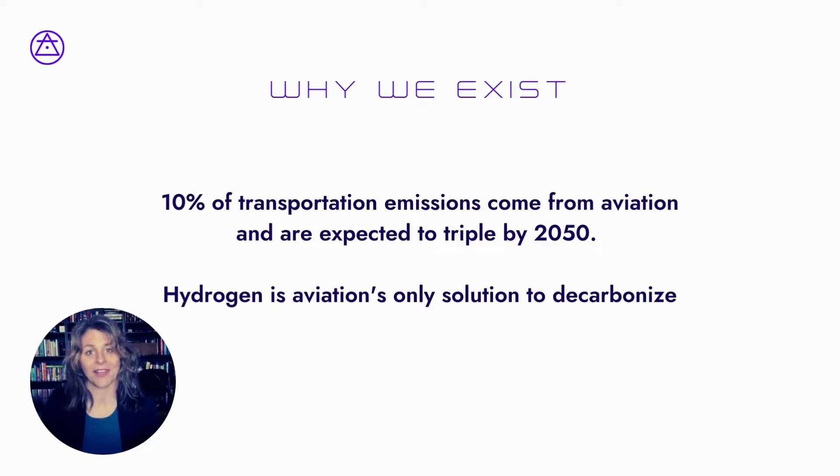We exist because 10% of transportation emissions are from aviation, and that number is expected to triple by 2050. We believe that hydrogen is the only solution to decarbonize aviation. There are three big challenges with implementing hydrogen for aviation. I call them the big three: infrastructure, cost, and regulatory.

We work with aircraft manufacturers, fuel cell developers, hydrogen producers, and everyone in between to help lower the cost and availability of hydrogen. And of course, we work with government, industry, and other organizations to help develop a safe path forward to regulate this nascent space.

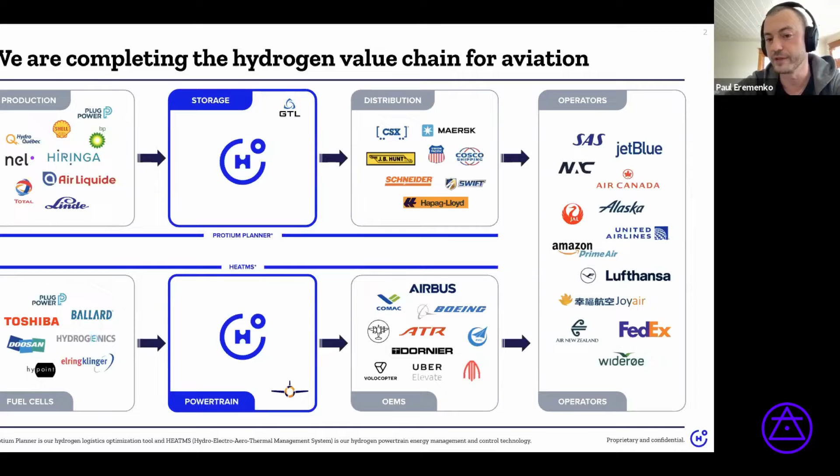And then lots of operators, both cargo and passenger, are very keen to decarbonize and are facing increasing pressure from passengers, from flight shaming, from no-fly movements, as well as from governments to move on decarbonization. So as long as the economics work, there's really no shortage of demand for adopting this. So this is how our concept of operation looks for regional. It wouldn't be that different for eVTOL, except that you probably need much lower cargo handling infrastructure, because the capsules are significantly smaller.

The basic idea is we take hydrogen, so we sign offtake agreements. We have forward priced offtake agreements for many geographies today, and we're adding more by the day. We take green hydrogen offtake typically at renewable energy production sites, which is where it makes sense to run those electrolyzers. We fuel the modules. We put those modules in shipping containers. They go on trucks, trains, or ships, and they get to the airport.

We have two types of modules, and we'll only focus on one today, but for the regional application we have both high pressure gas at 850 bar and liquid modules that are form factor equivalent, and they present the same interface to the aircraft at the quick connect. So an airline can choose on a flight by flight basis whether they want to fly with liquid or with gas. Liquid is more expensive, but gets you slightly better range. Gas is cheaper, easier, and has fewer logistical constraints on transportation. It can sit in these capsules almost indefinitely.

So we're going to focus on gas as the primary approach that I think is most suitable for eVTOL, particularly since the infrastructure has to be very flexible, given the number of conceivable vertipads where you would need to refuel the aircraft. The modules go via intermodal freight, and when they get to the regional airport, or in the case of an eVTOL, to the vertipad or vertiport, they can be handled using existing cargo handling equipment and infrastructure. So nothing new is needed. You don't need a storage reservoir, a hydrogen gas station, or a hydrogen tanker or fueling truck.

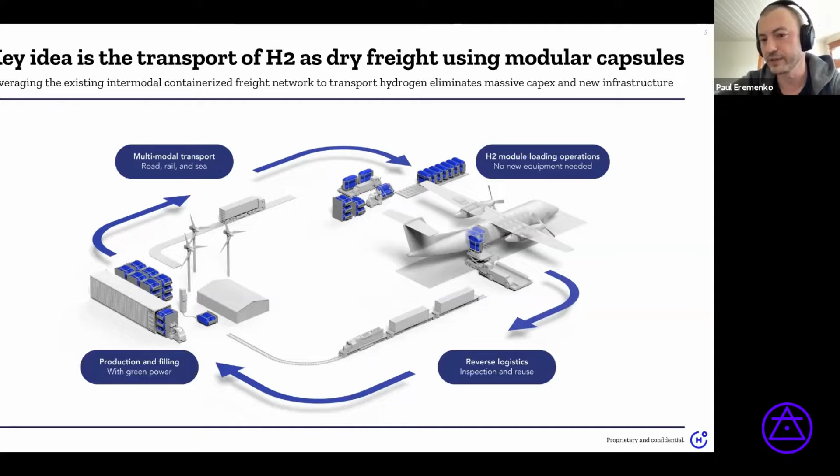So with that, just maybe a very quick introduction on JP and a little bit on the rest of the team. So JP is our CTO. He's on the faculty at UT Austin. Before that, he was at Georgia Tech, and before that, he was at MIT. As a faculty member 20 years ago at MIT, actually, he was my senior thesis advisor. So we worked together for many, many years. Also a serial entrepreneur and spent some time in industry, both at United Technologies and before that at Boeing and before that at NASA JPL.

We have a very strong executive team. Rod Williams, who's our chief commercial officer, is also on the call here. He's a longtime Bombardier executive where he ran regional programs as well as marketing, and then was an executive at Wheels Up.

And then we have also a strategic advisory board, which includes some very notable characters, and they're there not just because we like to hang out with cool people, but they're really there to de-risk a lot of the facets of what we're trying to do and trying to do very quickly. And that includes things like certification.

So we have a very aggressive path on certification, and really trying to get the FAA to move on this quickly, noting that certainly the fuel cells and electric motors are not issues of first impression for either the FAA or EASA, but putting them together into a powertrain and having this new approach to on-aircraft storage technology are new things. And so there is plenty of certification work to be done there. And so the advisory board is really there to mitigate that risk as well as commercial risk for us. So with that, JP, would you like to take over and talk about storage?

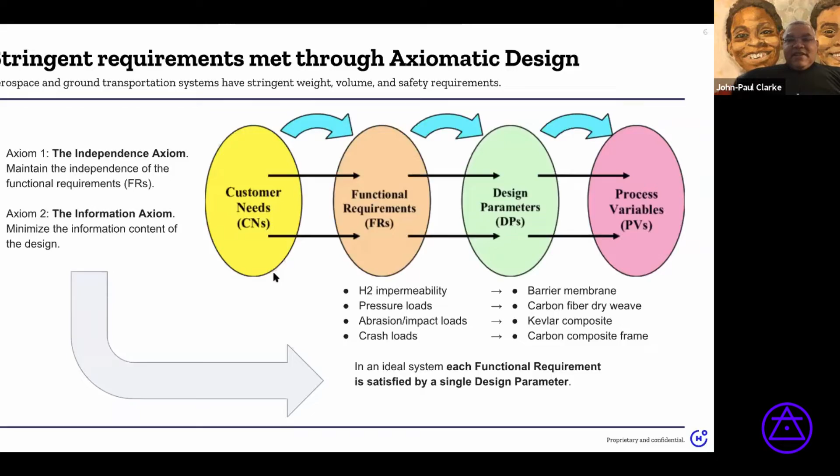Each of these functions are being satisfied by a specific design parameter, physical instantiation, which we can certify against that one functional requirement with minimum interaction between these, which we propose will help in terms of getting this certified as well. So with that principle in mind, we ended up, next slide, with a system that looks like this. The pictures in the bottom left are actually real pictures of our subscale model that we have built and started testing.

And I can hold it up while you're talking, yes, JP. And Paul likes to hold it up. He's going to be Vanna White for a second there. I'll bring it. I'll get it.

Okay, all right. So anyway, you can see here the membrane in the very far bottom left, the membrane that keeps the hydrogen in, and then outside we have a carbon fiber weave, and then both the membrane and the weave, and this yellow Kevlar on the outside, are all mated in a boss that we specially designed to hold and transfer the loads into the boss itself. And this one that Paul will bring is kind of the size you'd probably end up thinking about for the smaller eVTOLs.

And then the picture on the bottom right is the colorized one, because I think we like deep blue purples. That wasn't my decision, by the way. Inside the frame, and then Paul can hold up the subscale model right there for you guys. So when it was all done, we ended up, in the whole thing with the frame, with about 17% mass fraction. So of the entire system fully loaded, 17% in hydrogen, which is about twice the best in class for composite carbon fiber overwrap pressure vessels. And so that really was very nice for us.

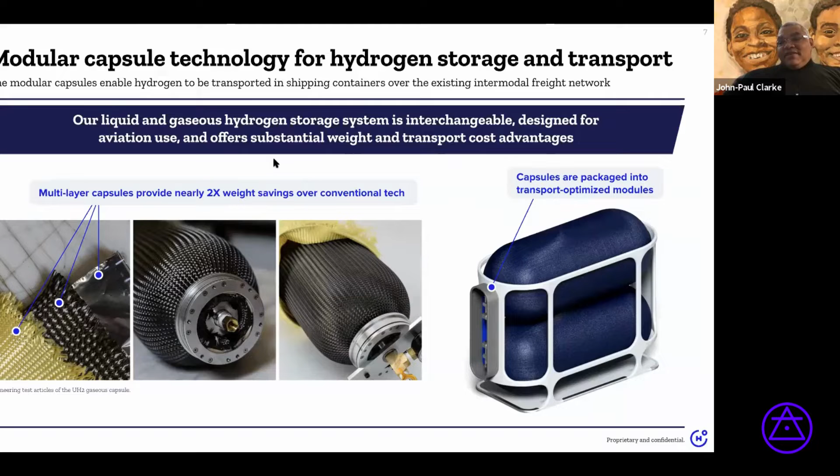And then we'd have a zero drag radiator, and this was inspired by the P-51 Mustang, which is basically to have a shaped cowling around the radiator so that, because you're introducing energy and the exit area is smaller, you generate a little bit of thrust, or just enough thrust to counteract the actual added drag for the radiator cross section as well.

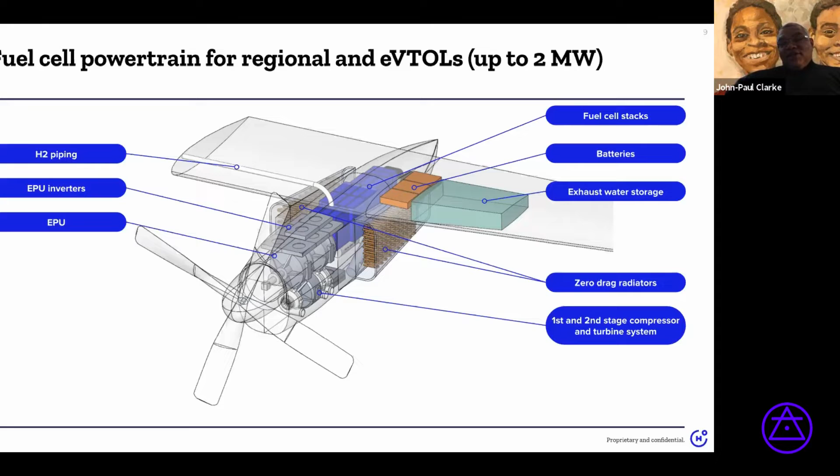And we actually like to think that our vehicle is going to operate like a Tesla or another, I mean, e-car in terms of takeoff, acceleration, and climb performance. In fact, the lapse rate on these powertrains is actually less than it is in a conventional engine. And so we'll expect to have better climb performance as well.

Next slide, please. So as we were going through, we realized that since we're building an initial sub 60 to 100 kilowatt powertrain, and then a 1 megawatt powertrain and a 2 megawatt powertrain, the 60 kilowatt powertrain will be running actually probably week after next. And so after the pandemic is over, if anybody wants to come to LA and check out a running 60 kilowatt powertrain, please let us know.

So anyway, we realized that it would be good to apply this to eVTOLs. And this is what I'm going to talk about for the rest of the time. We looked at the Uber Elevate reference design because that was out there in the public. And as you can see, for that design, you have a payload of about 450 kilograms, empty mass fraction about 57%, L/D of 14. Some of the numbers here we actually inferred based on the other numbers, but we have, as a consultant and part of our team, Brian German from Georgia Tech, who is very well versed in the eVTOL sector. And so we used the numbers, the vehicle and the mission requirements.

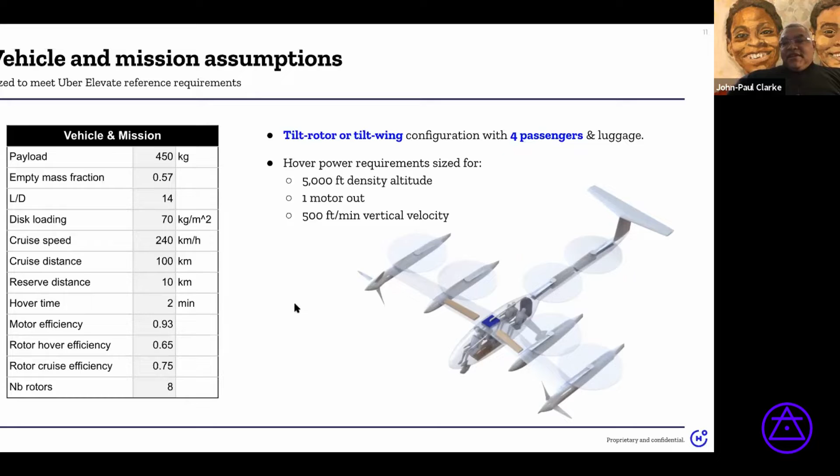We went through and we said we could satisfy those mission requirements in one of 3 ways. One, we could use a high specific energy battery, which is sort of the de facto or baseline way of going about it, with about 300 watt hours per kilogram, a C rating of 10, basically a pack energy density of about 150 watt hours per liter.

Or we could use a fuel cell and gaseous storage system, a GH2 storage system, which together gave you much greater specific power. However, the gaseous density, the whole density of the system, goes down. There's also another way, which is to basically do a hybrid, which is where we end up looking at, and we're going to compare this, where you take a high specific power battery for the hover and takeoff components, and then you use the fuel cell for the cruise component,

and also to recharge the battery. And so what that gives you is the fact that batteries, especially the high C batteries, are really good in terms of giving you the power you need with relatively low mass and low volume. And then you can use a fuel cell where it is really best, which is it's really good at high specific energy.

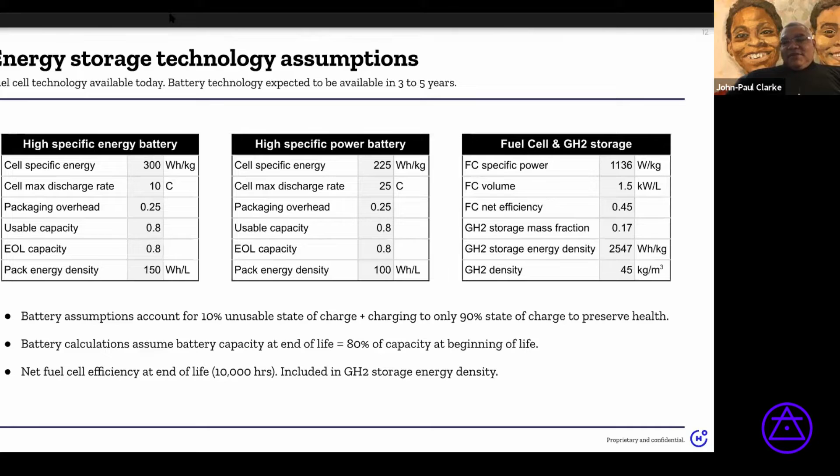Next slide, Paul. So when we were all done, we ended up with the following. So for our battery system, 450 kilograms payload, the system would weigh about 3,200 kilograms. And the actual volume of battery required would be about 900 liters. Now, if we did just a straight fuel cell system, it would be heavier and it would require more volume for the fuel cell and hydrogen storage as well.

However, if you, again, compartmentalize, and this is almost a recap of the axiomatic design, which is you need to have the function for vertical takeoff, and you need the function for cruise. If you can then separate them and have each design parameter meet them optimally, we end up with a system which is close to half the weight of the battery system, your baseline system, 1,700 kilograms.

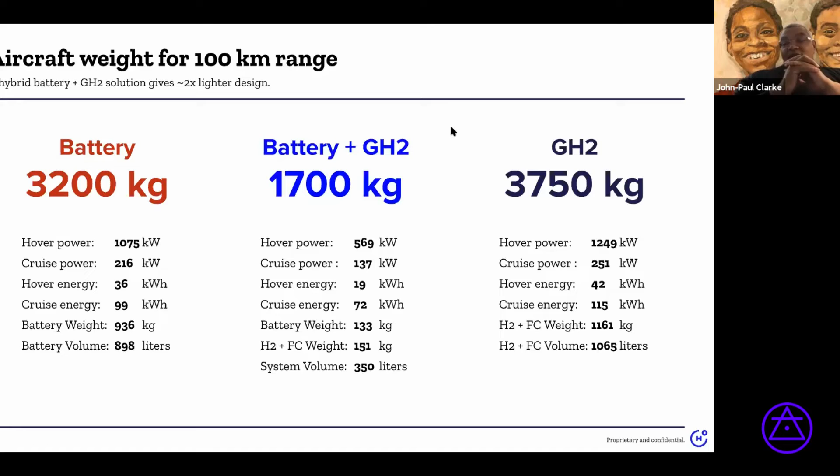And because of our storage technology, it turns out the volume required is actually about 350 liters, which is very small compared. It's basically less than half what you would have needed if you had the batteries. So this hybrid solution looks really, really good. 2 times lighter, more than 2 times smaller in terms of volume, which gives you more carrying capacity. So it opens up a great deal of potential.

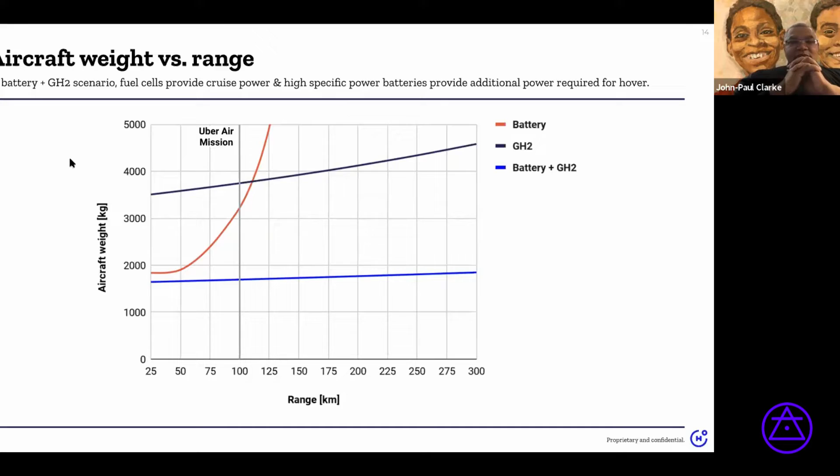And then your added range is just given by the weight of the hydrogen, and the weight of the hydrogen is not that big a deal in the big scheme of things. And another way to look at it is basically look at the energy. The next slide there, Paul. You got it? Is to look at the specific energy versus range. And you can see quite clearly here that the battery has a constant specific energy.

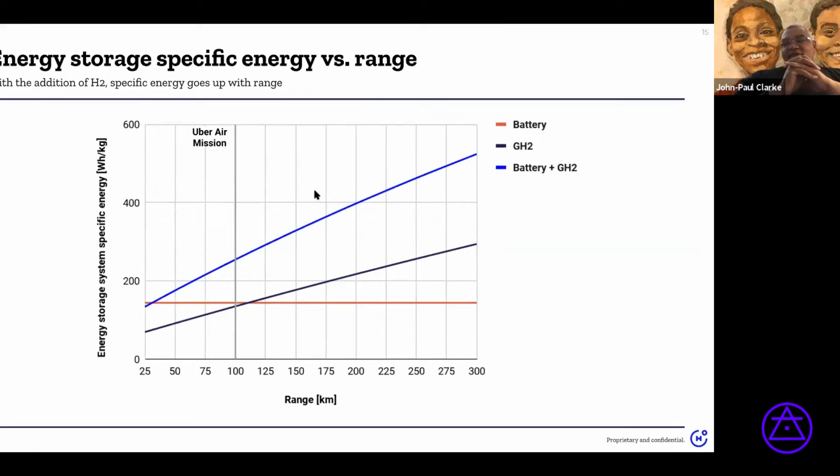But as you basically increase range, you get more and more specific energy because of the hydrogen. The added cost in terms of the hydrogen, in terms of weight, basically is just marginal as you go along. So I will stop there, and I guess we should go into Q&As, right?